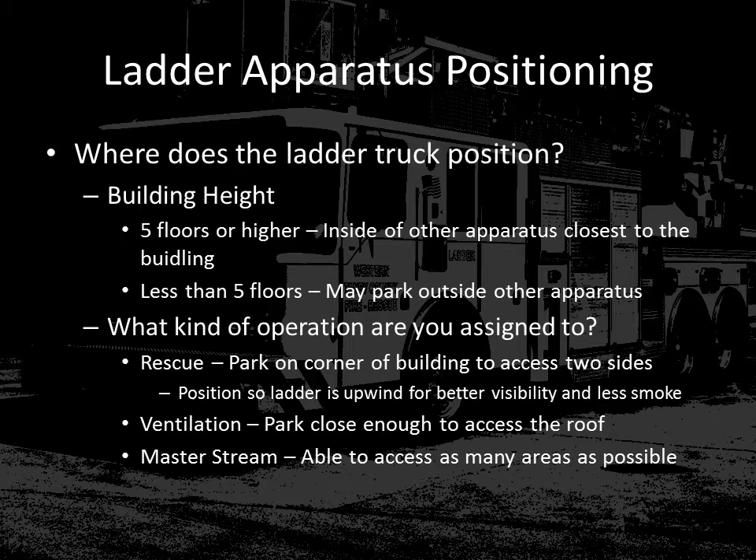When you arrive on scene, one of the primary considerations for the apparatus operator is what's overhead the apparatus. It's critical that you do not park under obstructions such as power lines, trees, or building overhangs that would limit movement of the ladder or prevent its use altogether.

It's also important to observe what kind of ground is underneath the apparatus and what you'll be placing your outriggers on. If you're on solid ground such as concrete or asphalt, we do not need to set the jack plates to provide additional stability. However, in cases with soft gravel or sodded areas, the jack plates should be used to provide a substantial, flat, stable surface for the outriggers to sit on.

In cases of ice or snow, it's extremely important that ice cleats be mounted on each of the outriggers prior to deployment. Failure to do so may result in the apparatus sliding on the outriggers while the ladder is up in the air.

Water supply is an important consideration primarily during firefighting operations using the ladder and waterway. Where is the water going to be coming from? Are we getting water from a hydrant, and if so, will the ladder truck have to bring its own water supply? If so, identifying your nearest hydrant and laying in your own supply line may be an important consideration. However, if you're going to be supplied by an engine or other apparatus, they may be able to bring water to you.

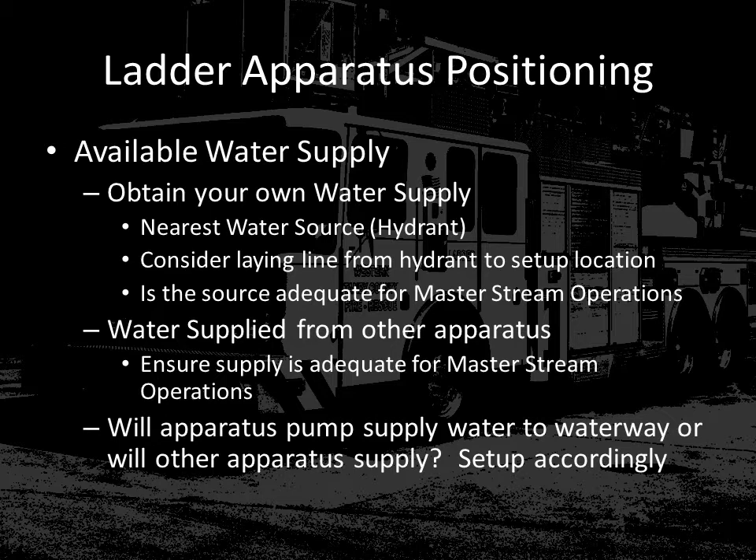If you're going to be flowing water and using the ladder at the same time, remember that the ladder should be raised and put into position prior to engaging the pump. When the pump is engaged, the automatic high idle feature is disengaged so there aren't fluctuations in pressure. So if you're going to be flowing water, set the ladder first once the waterway is assembled, then engage the pump. That way it doesn't delay getting the ladder in place.

Now we're going to discuss the apparatus setup procedures. There are several different procedures we'll cover, including using the ladder only and engaging the ladder PTO, using only the pump similar to a standard engine company operation, using the generator for lighting or other electrical issues, or using multiple systems at the same time.

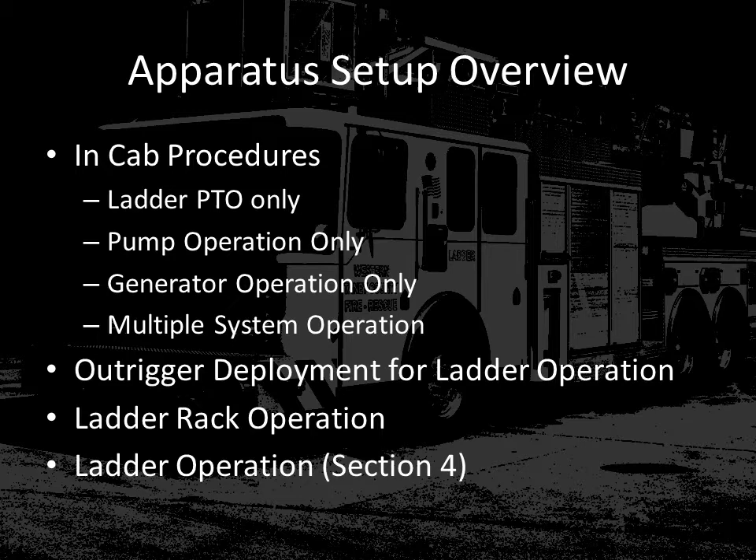We're also going to cover the basic deployment of the outriggers for ladder operation. We're going to discuss the operation of the ladder rack, and we will cover ladder operations in Section 4.

When we're getting ready to set up the apparatus, it's important to remember that we are going to be raising a long 100-foot ladder, and making sure that the apparatus is set up properly and has adequate support will dictate how much use we're able to get out of our apparatus.

First, we need to talk about the in-cab procedures if we're only going to use the ladder. We're not going to use the pump, or we're not going to use the generator. It's important that the transmission be in neutral and the apparatus parking brake is set.

Something that's unique to this apparatus is a front axle service brake switch. This switch activates the brakes on the front axle only and assists in keeping the vehicle stable and prevents it from rolling. Once the front axle service switch is set, then we will activate the ladder PTO switch. You will hear a very easily detectable change in the engine and a small whine, indicating that the ladder PTO is now engaged.

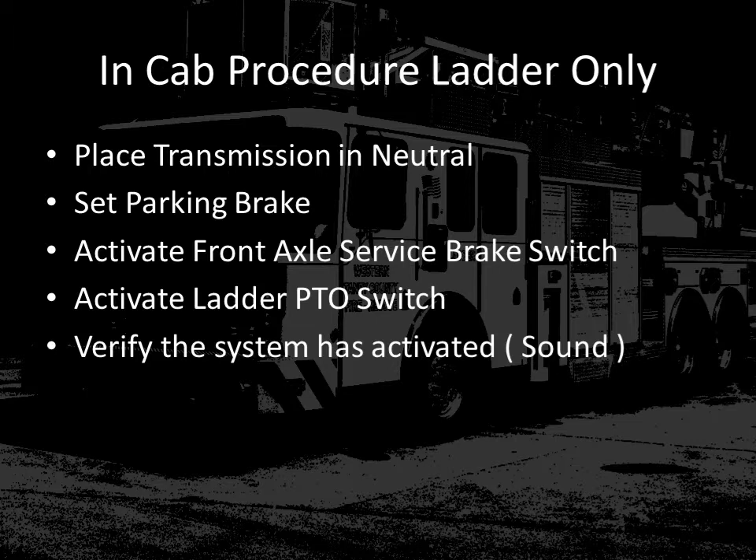Okay, first when you arrive on the scene, to engage the ladder, place the transmission in neutral, set the parking brake, engage the front axle service brakes, and then engage the ladder PTO.

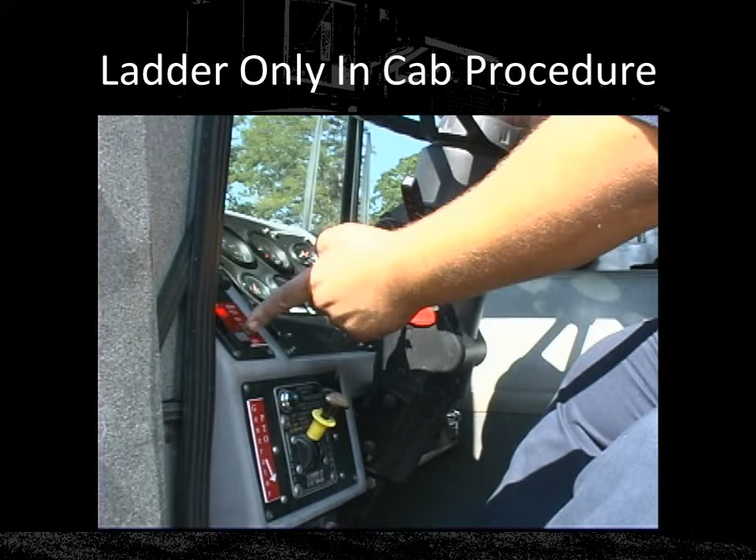If we're going to use the pump and ladder in conjunction with each other, we will follow the ladder only procedure first. This will allow us to raise the ladder and get it into its position faster than if we had the pump engaged also. Once we have the ladder in the position we want, we will disengage the ladder PTO switch.

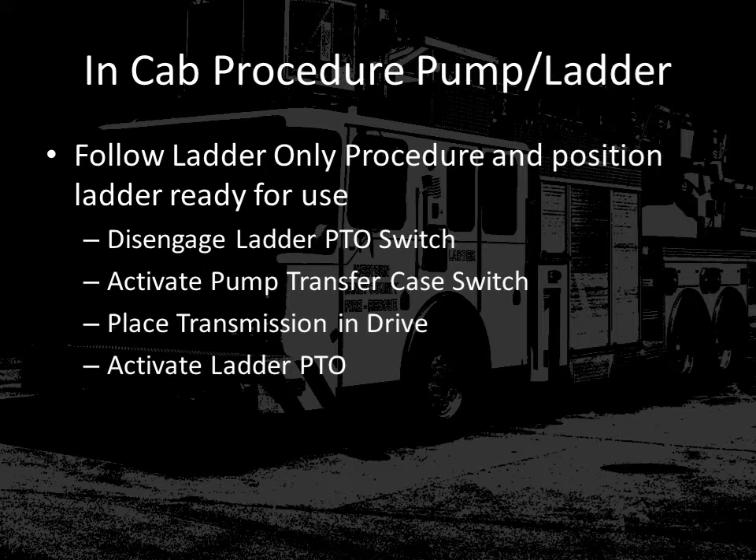Then, near your left knee, you will activate the pump transfer case switch, place the transmission in drive, starting the pump, and then again activate the ladder PTO.

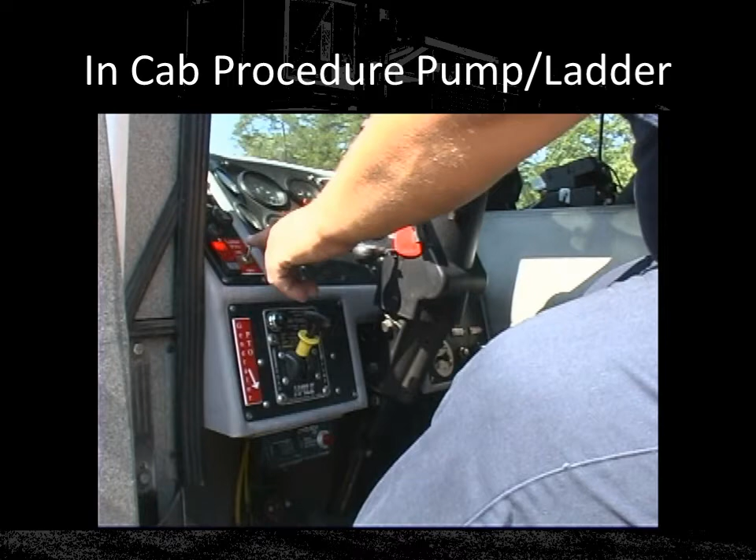To use the pump while using the aerial device, first remove the aerial device out of gear, engage your pump, place it in drive, then re-engage your ladder PTO.

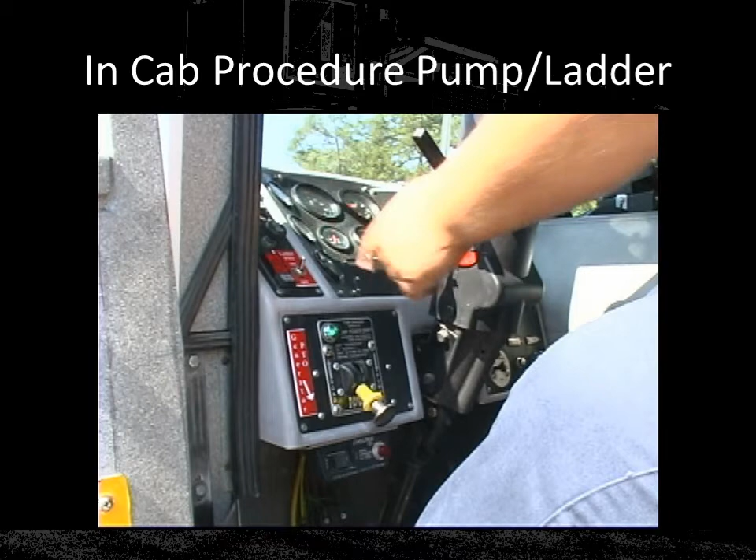If we're going to operate the apparatus only using the apparatus pump, similar to an engine operation, this would be very similar to what most of you are already used to.

It's important to remember that we need to open the tank to pump valve and the tank recirculation valve prior to starting the pump. This prevents damage to the pump from running it dry without any water in the pump case.

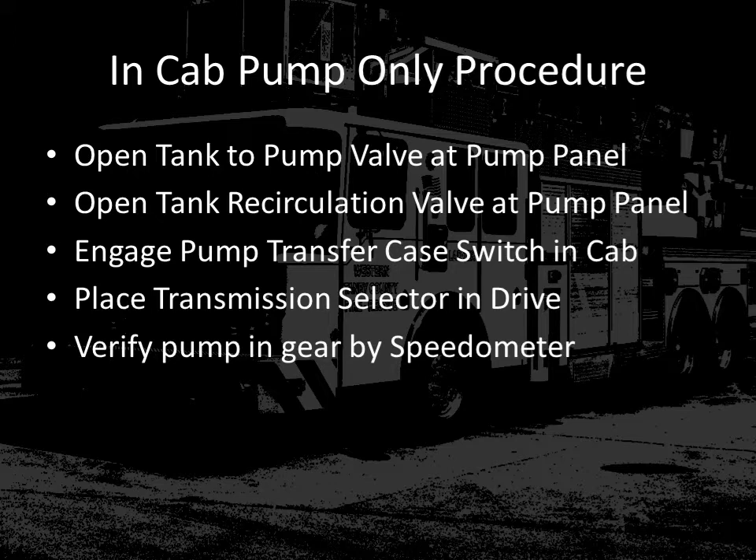Once you have both the tank to pump and tank recirculation valves open, you will go back to the cab, engage the pump transfer switch, place the transmission in drive, and then the pump will be engaged. You can verify that the pump is in operation by looking at the speedometer, and a positive miles per hour indication should show on the gauge.

To operate the pump, first place the transmission in neutral, shift the transfer case to pump, then place the transmission in drive.

Take the pump out of gear, place the transmission in neutral, shift the transfer case back to road.

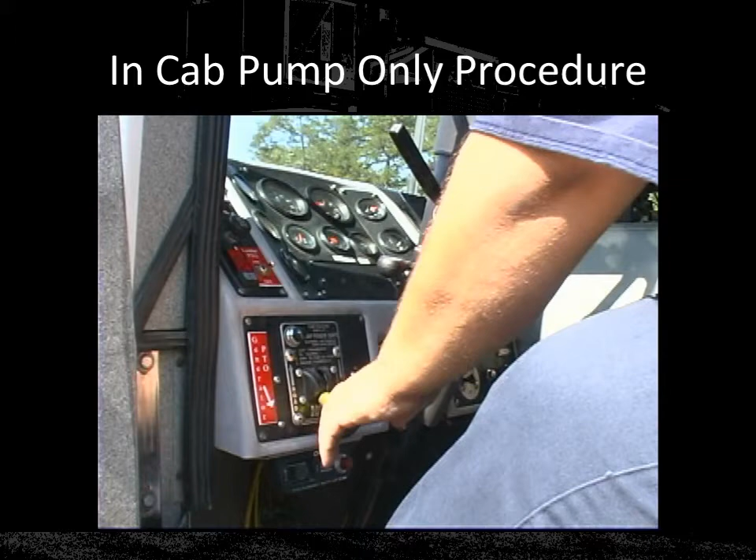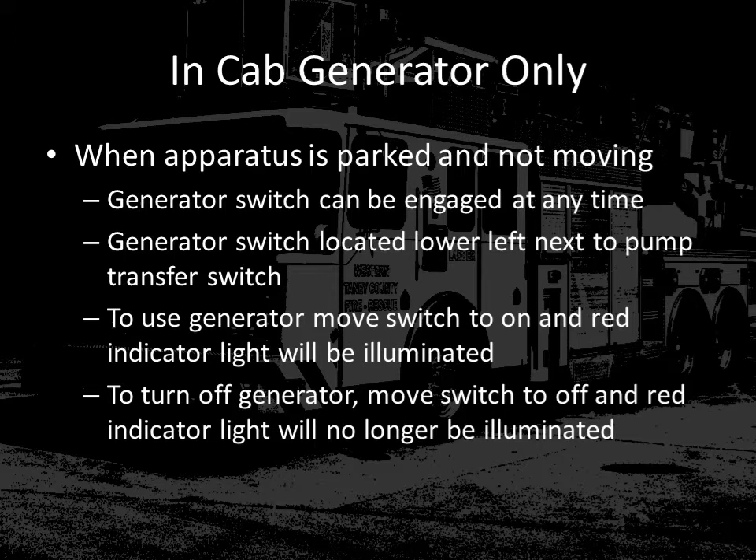This apparatus also has an onboard generator. The generator can essentially be used anytime the apparatus is parked and is not moving. To engage the generator, find the switch located in the lower left part of the dash next to the pump transfer switch. To activate the generator, simply move the switch to the on button and a red indicator light will be illuminated. When you're done with generator operations, simply move the switch to the off position and the red indicator light will no longer be illuminated.

To operate the generator, at any time, simply engage the generator PTO. To disengage the generator, simply deactivate the generator PTO.

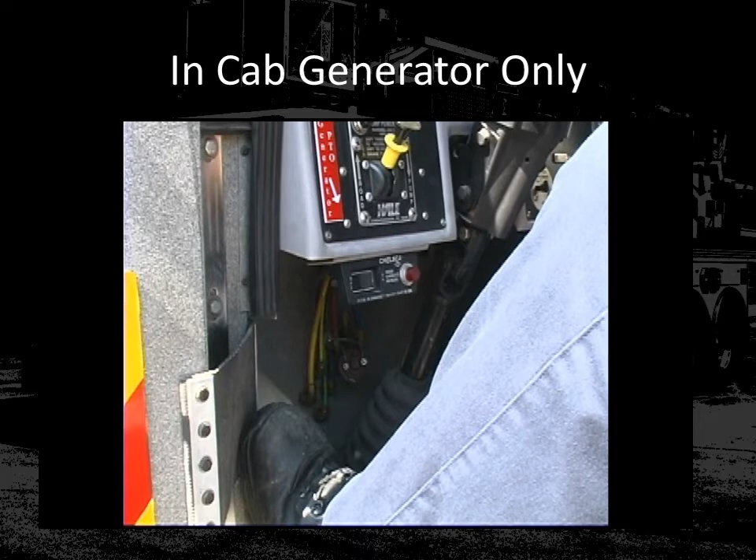Once you have those operations completed, it'll also be time to deploy the outriggers. It's important that once again a 360 walk around of the apparatus is completed prior to deploying the outriggers to make sure that there's sufficient clearance for the outriggers when they come out away from the vehicle.

Ensure that all the outriggers will have stable ground underneath the jacks as they come down. Remember that the preferred surfaces will either be paved or at least a good solid gravel surface. If you have any concerns about ground stability, at a minimum use jack plates that are provided to provide a more stable surface. Remember also that it's very important to make sure that the ice cleats stored in compartment 11 are used if there is snow or ice covering the area where the outriggers will be deployed.

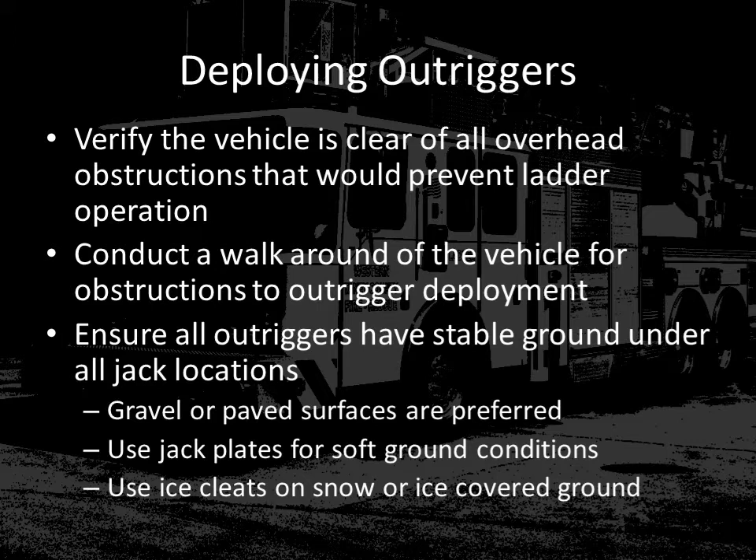For normal operations to deploy the outriggers, you will simply grasp the joystick and move it to its far left position for the left control panel. This will automatically deploy the outriggers and will automatically increase the engine RPMs while the outriggers deploy. You will continue to hold the joystick in this position until the engine RPMs return to idle.

Now, if for some reason there is an abnormal operation for the outriggers, the two blue buttons allow independent control of each of the outriggers for the left and right hand side. In most cases, we will not need to use these buttons and functions to set up the truck.

The yellow buttons to the left are the rescue basket control buttons. Once you have the outrigger set, you will depress the top yellow button. This will rotate the rescue basket into its up position for use by occupants.

You will also notice that above the yellow and blue buttons are a green and a red indicator. The green indicator is a standby light for ensuring that all the pressure on the jacks is appropriate for ladder use. The red indicator light is a pilot light for axle locks. This should be illuminated, stating that the axles are in their locked position for ladder operation.

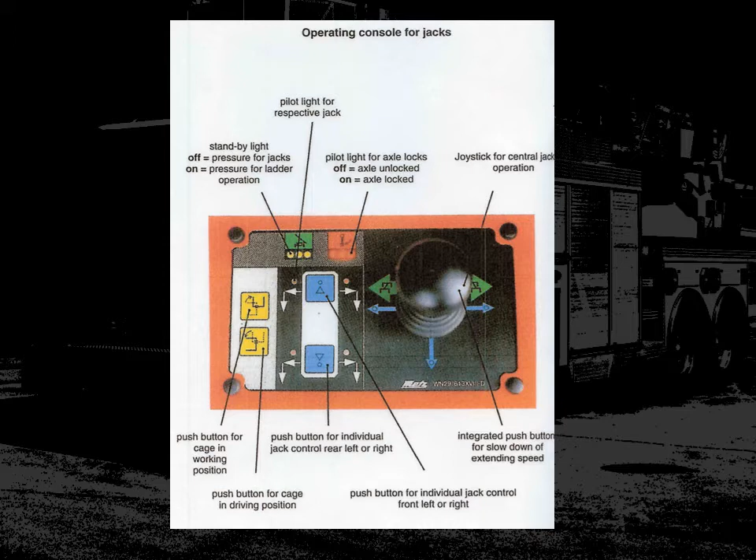So once again, when you first deploy outriggers, you should do this from the left position. You will grab the joystick, hold it in its left position, and the engine RPMs will automatically increase until the outriggers are in their positive position. When it's done, the engine RPMs will return to idle.

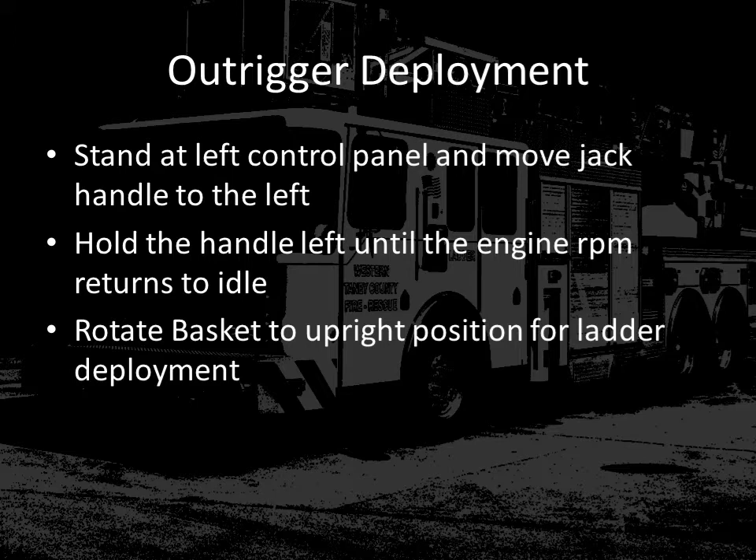Before you move to the right side of the truck, however, remember to use the yellow buttons and rotate the rescue basket into its up position so personnel can occupy the basket. Under normal setup, simply press the outrigger lever to the left.

Until the RPMs drop. To raise the basket, press the basket raise button.

Next, we're going to move to the right side of the truck. When you get to the right side of the truck, there will be another outrigger control panel, and there will also be a ladder rack panel. It's important before we raise the ladder that we verify that the ladder rack is in its full down position.

To operate the ladder rack, you will first turn on the power button, and then you will use the down button to bring the ladder rack to its full down position. You'll also notice that there is a green indicator light that indicates when the electric motor to provide movement for the ladder rack is activated.

It's important that once you're done with ladder rack operation that the power switch is turned off so that it does not damage this electric motor.

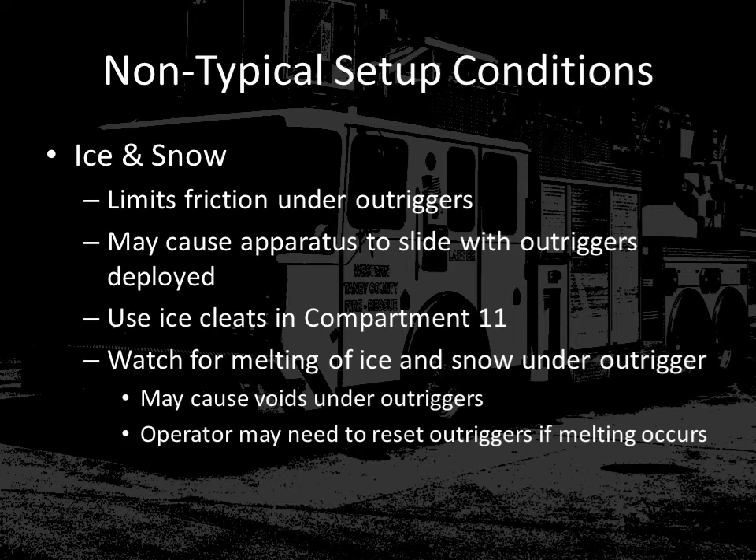Once ladder operations are done and we're ready to return the apparatus to the road, we will discuss auto bedding in section 4, but it will be important to make sure that the ladder is completely bedded and that we have an indicator of 3 green and 1 white light from the turntable operator's position.

Once we have 3 green and 1 white light, we will retract the right side outriggers and return the ladder rack to its up position. We'll then move to the left side outrigger control panel and we will bring back the left side outriggers and the ladder basket will be returned down.

If we use ice cleats, make sure that they're returned to compartment 11 and make sure that you perform a walk around of the vehicle and verify the vehicle is ready for the road prior to moving the vehicle.

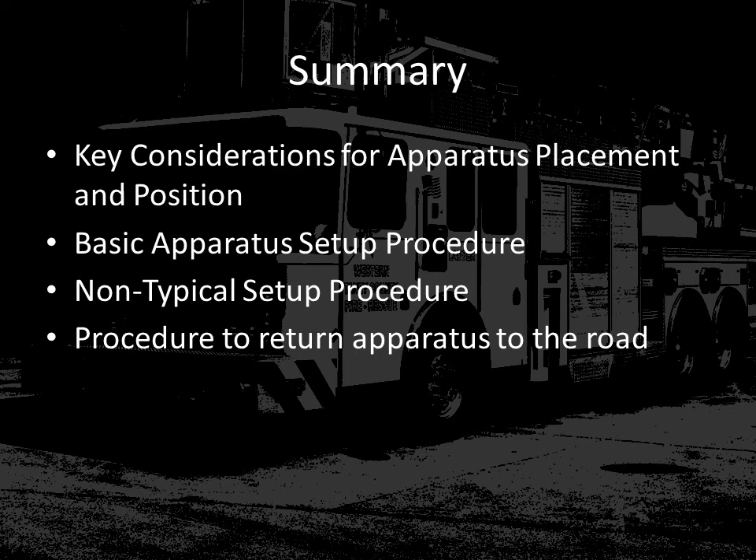So in section 3, we've covered some key considerations for apparatus placement and positioning. We've talked about basic apparatus setup procedures. We've discussed briefly some non-typical setup conditions that may occur, and we've covered the procedure to return the apparatus to the road.